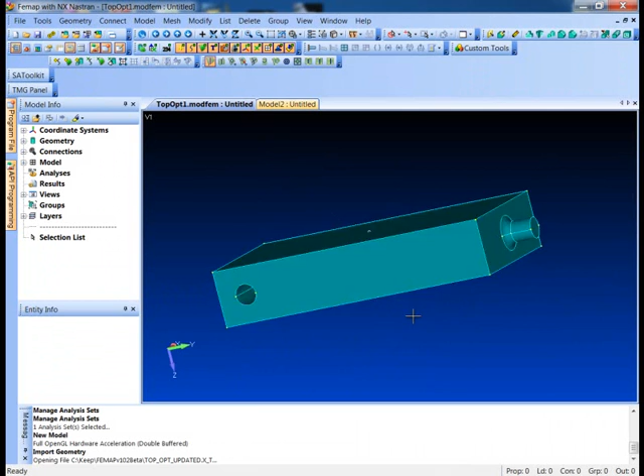I'd like to walk through a little example of using the new topology optimization module in Femap version 10.2. I've got this part here that represents the outer volume for a little torque linkage. We're going to let the topology optimizer determine what shape we should actually make this part.

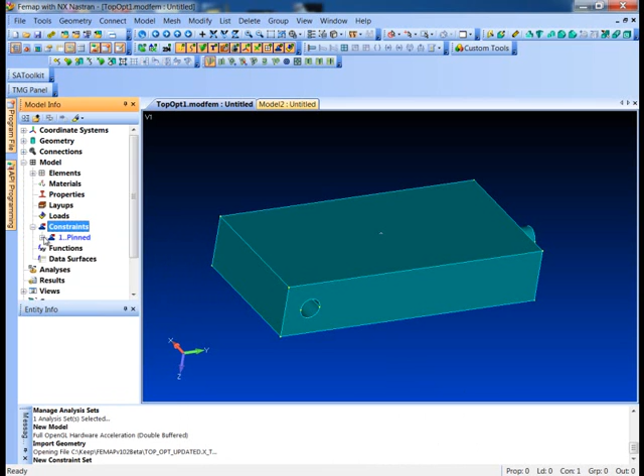So first thing we'll do, it's a regular finite element model, so we're just going to take this piece and apply some constraints. What I'm going to do is pin it through the holes here and on the boss on the end where the torque load's actually going to get applied. So I'll go in here and create a new constraint definition on surfaces and pick the circular surfaces here. We'll set those up so we won't let them grow radially, and we won't let them slide. So basically these are just going to allow them to torque, rotate around their axes.

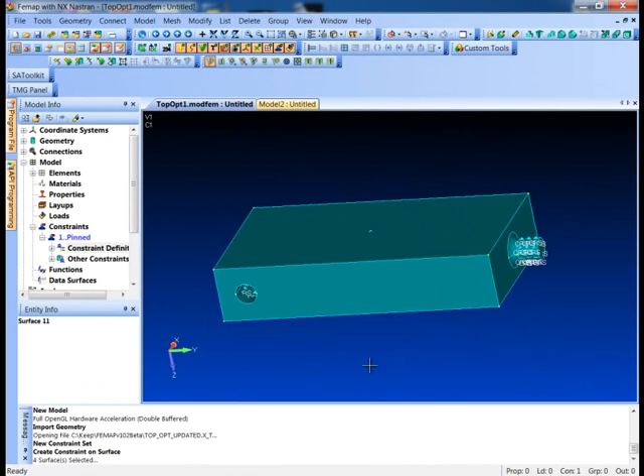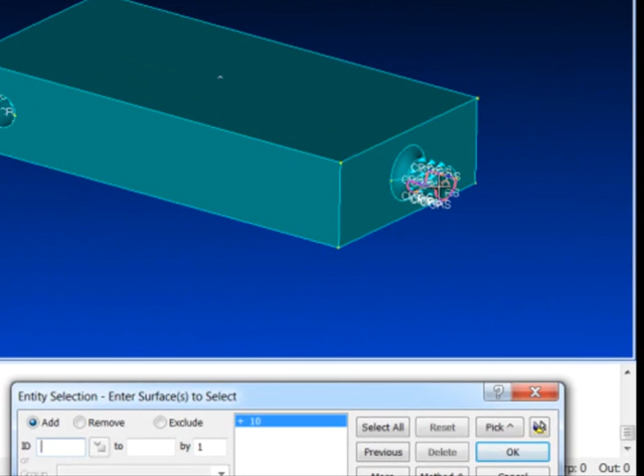So there's our constraints, and let's go ahead and throw a load on here too. I'll say new, and I'll call this positive torque. What we're going to do is go in here and open up the load definition, create a new load definition on a surface, and we'll apply our torque load right there. I'll do a new - this is actually a torque load we added just a couple of releases ago in Femap - but we'll do 250 inch-pounds, and I'll say OK, and it asks me for a vector.

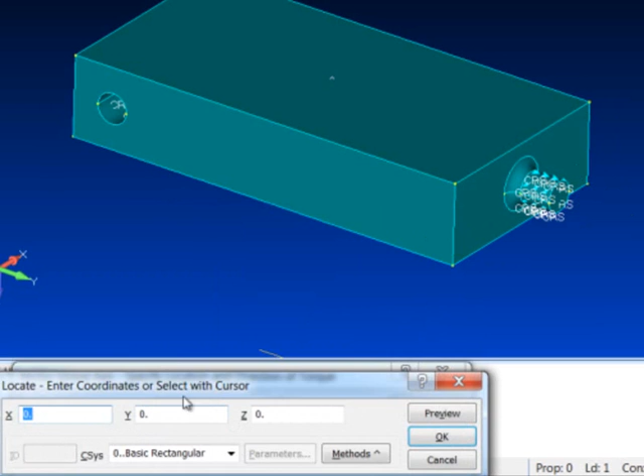What I want to do is use a global Y vector, and then I want to pick the center of that surface. So I can hit Control Z, which brings up the standard coordinate box that has a method that's the CG of a surface. So I'll pick the CG of that surface there. It fills it in for me. I can do a preview and say, yep, that's the right vector. And I've applied my torque.

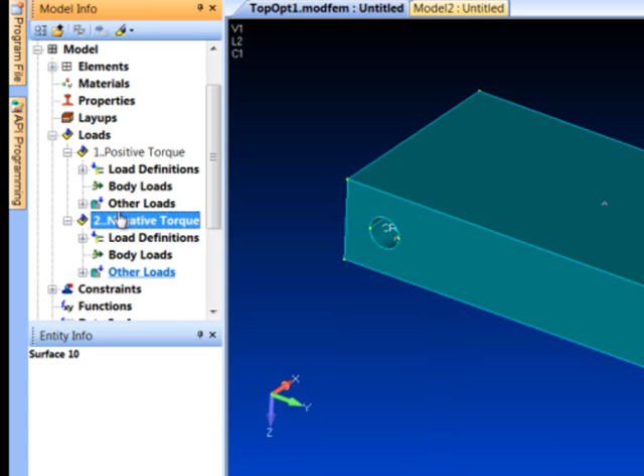The nice thing we can do here now is I'll just copy this to a separate, new load set. And I'll just go in here and do a little renaming work and call it negative torque. Then I'll actually go in and edit the load definition - it's just a copy of the other one. I'll edit the load, and I'll just make it minus 250, and this will give me the opposite direction.

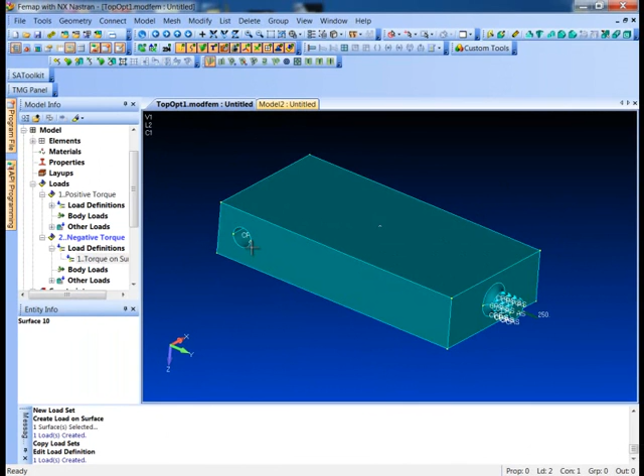You do want to be careful when you're using the topology optimization that you include all the load sets that your part might see. This way, you're basically optimizing properly. If you don't consider all the load sets, you could get some shapes that probably wouldn't be optimum for some other type of loading, so you want to get them all in here. Since this is a torque thing and we've got everything set up, it's just going to twist one way or the other.

Let's go ahead and mesh this. I'll just open up my geometry, pick my one part and say mesh, and we'll make it out of aluminum. Say OK, and just let the mesher fly. So now we've got our model ready to go.

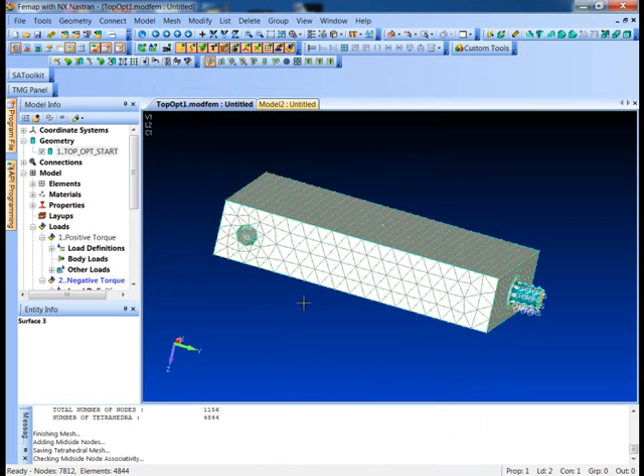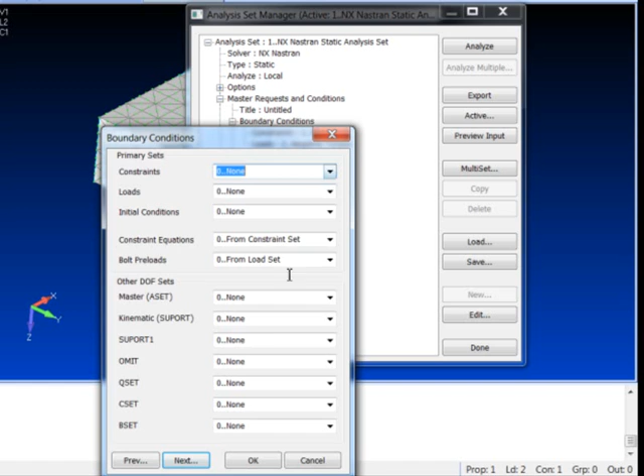I'm just going to go ahead and save it and set up the analysis. This is just like setting up any other analysis in Femap. We are optimizing here for the torque loading, so we do want to set up both of those load cases. By default we get just the current active one, so I'm going to turn off the master load cases here and use our multi-set to create, for the one constraint set we have and all the load sets we have, create subcases.

And I'm also going to set up our topology optimization run. So I just want to say yes, we're topology optimizing. I'm going to include all elements - you could actually include just a group of elements and only optimize in a certain area, but we want to go ahead and optimize the whole thing.

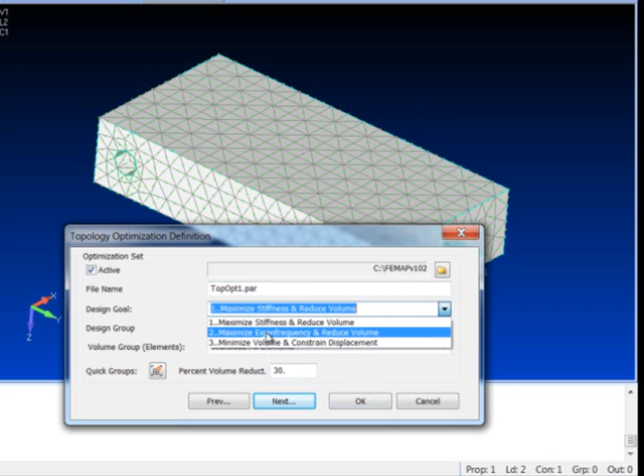And I'm going to try to take out 50% of the mass. I'll set that as my goal. We are trying to maximize stiffness and reduce volume. There's also, for frequency or modal runs, you can actually try to optimize for a maximum frequency and stiffen your part while reducing volume, or set up a volume constraint with a maximum displacement. But here we just want to make it as stiff as we can and reduce volume. Actually, did I lose my 50% there?

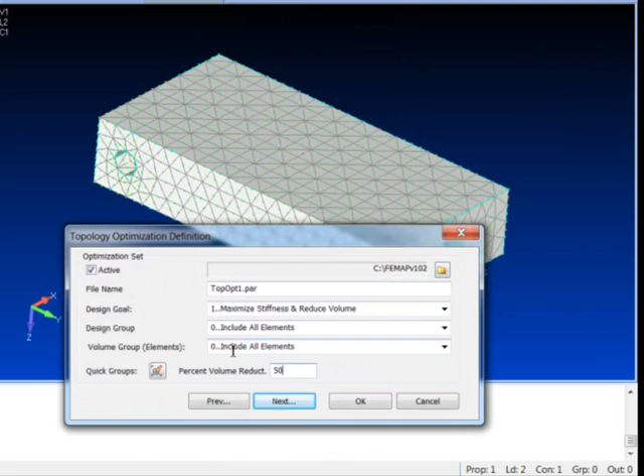Let's make sure. Let's say OK, we could freeze groups. You could do some wall thickness things. Set up some casting directions. And in this case here, I think we're just pretty much going to let it go and let it run.

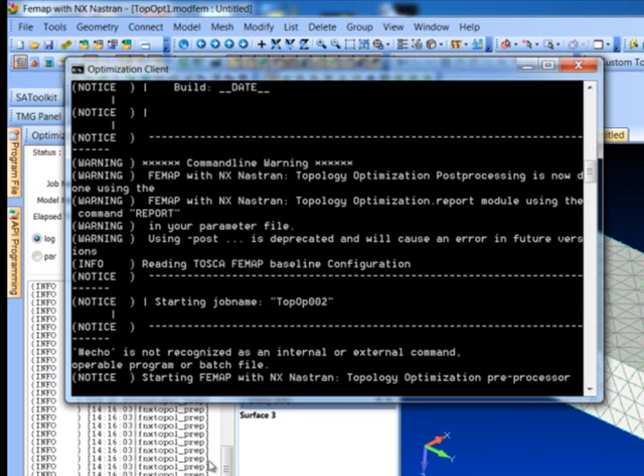Alright, let's go ahead and run this now. Hit the Analyze button. What this will do is spark off the analysis. This actually runs Nastran multiple times, looking at the results of each run and basically doing some work on the stiffnesses of the elements and basically carving away parts of the part.

We can actually watch the design objective change. So after 2 runs of Nastran here on this part, we should start seeing some changes. The stiffness will show up and the volume constraint. The volume's already been dropped down to 82% of original. The design objective, which would be the maximum stiffness, which the full part was this — it's basically keeping the part almost as stiff as it was.

We'll just let this keep running here. It's already through 3 iterations. I may actually edit the video and carve out some of these so you don't have to watch them, but it's not going to take too long here. You can see it's progressing along nicely.

Design objective is still maintained real well. We're still at 99.5% of the original stiffness. The volume's down to 63%. Remember, we're shooting for 50% reduction, so we'll just let this run.

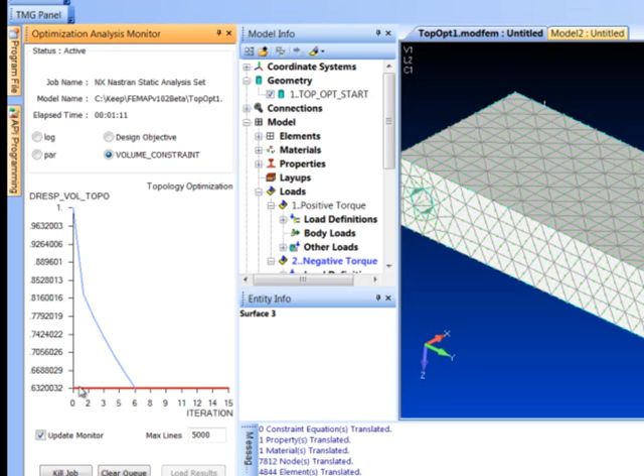Alright, the model's done here. We can see that our design or volume constraint was met with pretty much a 50% reduction in the volume of the object. And the stiffness stayed right up there at 98.9%, so our model's pretty much as stiff as it was. I'm going to go ahead and shut this down.

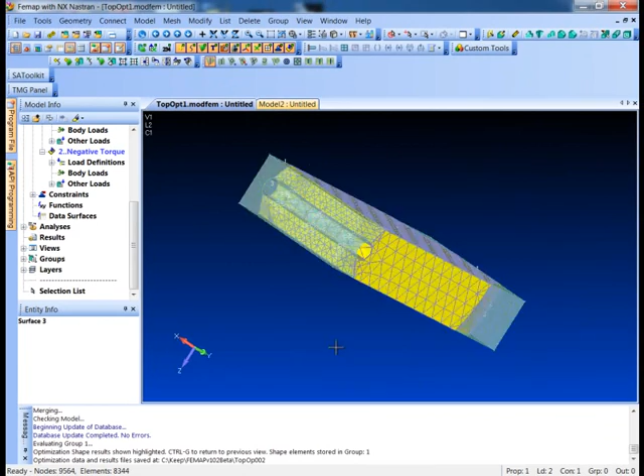Now, the topology optimization, you got to remember, this is pretty much a recommendation for a design modification that will remove some mass from your part. So obviously the lugs here, we're not going to take them completely away — that just doesn't make any sense. But it looks like the middle here, we can certainly get away with it.

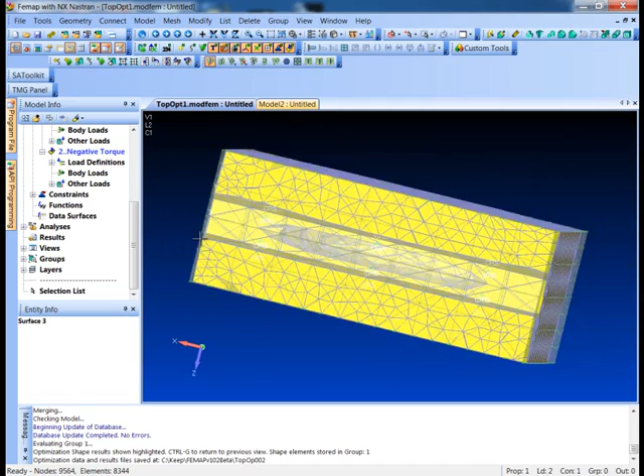And if you look up the inside here, you'll notice — let me turn off all the geometry so we just have the mesh here. You notice it actually started carving in up the middle. So it's actually suggesting to me design modifications should be to basically hollow this piece out, take off some of the edges here, and leave the rest of the part.

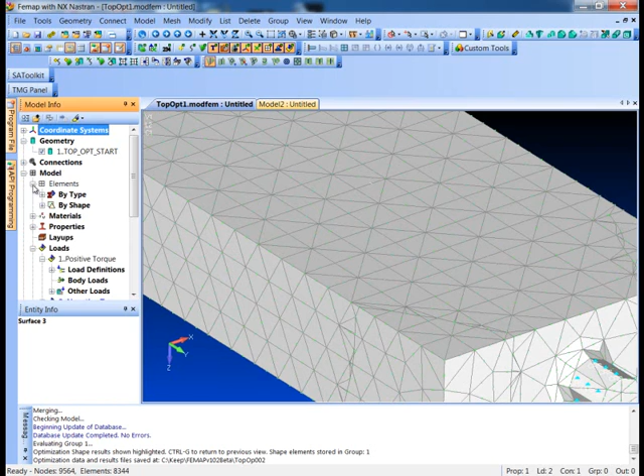So what we've done is we brought in here, these are plot-only elements in Femap. They're just highlighted right now, so I'll go ahead and redraw the display. But we can use some of the visualization tools in Femap. I'm just going to turn off the original solid elements and look at just the resulting topology optimized mesh or shape, and actually go into a wireframe view, and you can see that it's showing us how to carve this out up the middle.

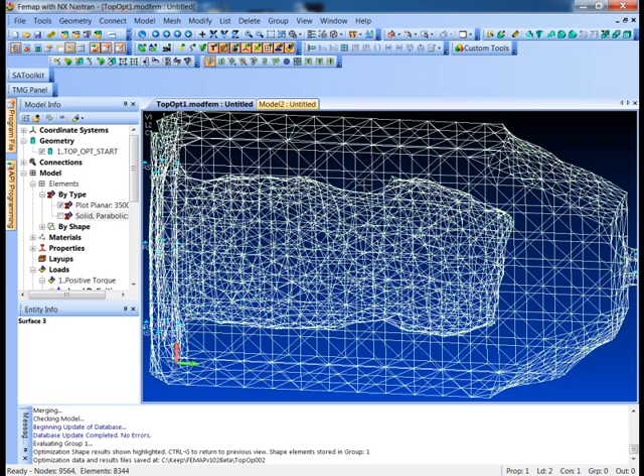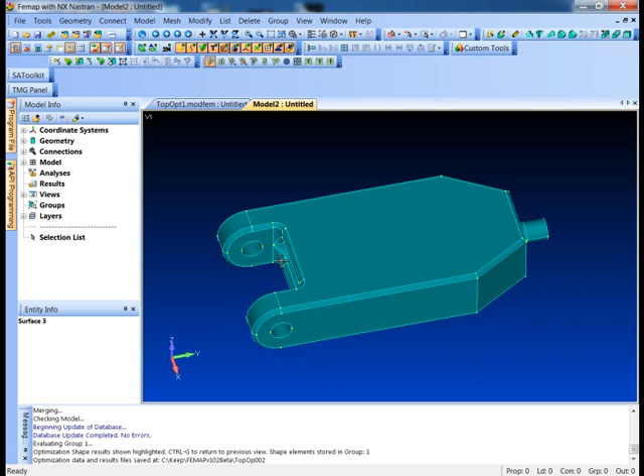Now, obviously this is a pretty free-form shape. It doesn't make a lot of sense for design, but what I did is obviously I've already run this once, but I used these results to bring in and edit the geometry to come up with a better shape. So you can see here, this kind of what you might do with the results is say, it's telling me to hollow it out in the middle, carve off the edges. A bunch of material here really wasn't needed, so my volume can be reduced a lot.

We'll just do a little geometry check here. Let me turn my surfaces back on, go into a solid view. We can just do a quick mass properties on our solid here, and I can pick that solid and say OK. And I'm just going to put in the density as 0.283. So it tells me I got a total mass of 27.8.

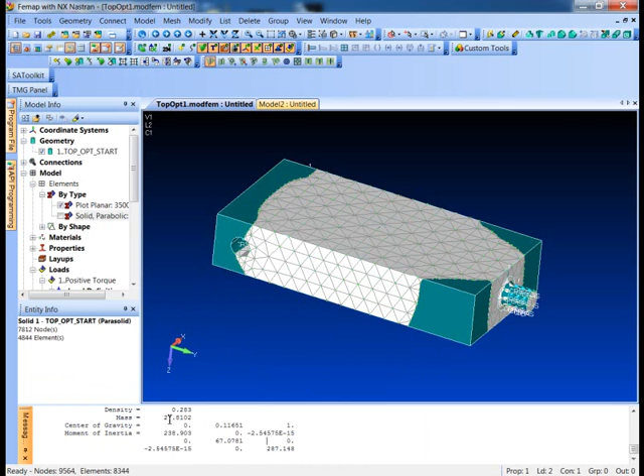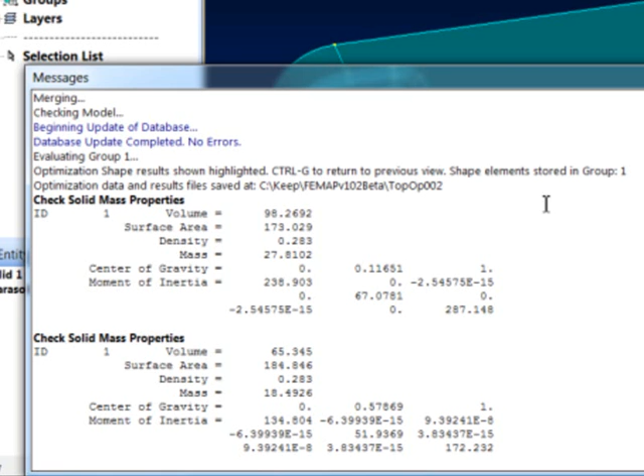I can pop over to my other model, do the same thing. So here's my reduced design — solids, pick him. Don't need a node, we're not modeling that right now. 0.283. You can see here we got a pretty nice reduction in overall mass from 27.8 to 18.4, and you remember the stiffness really wasn't affected that much. So it's a fantastic tool for helping you optimize the shape of a design.